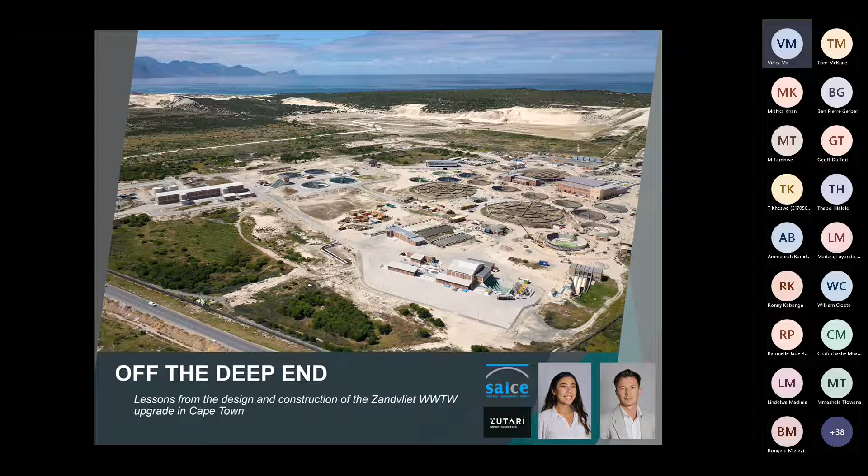Okay, let's firstly start off by introducing ourselves. So I am Ben Gerber. I was born in George in the Western Cape. I matriculated at Outeniqua High School in George, moved to Cape Town after high school, and obtained my Bachelor's of Technology from CPUT. I then very recently registered as a professional engineering technician in 2022. I have about 5 years of experience within the built environment unit at Zutari and Aurecon.

Major projects that I have been involved in, both national and international: some that are noteworthy are the current Harbour Arch development in Cape Town, which most of you would have seen when you drive into town. They're busy with construction and have topped out the first tower. Then there's St. Mary's water treatment works in Sydney, Australia, which I believe is one of the biggest water treatment works in Sydney. I also assisted the Aurecon Africa team in the design of the Calatrava Tower, which was planned to be the world's tallest building after the Burj Khalifa. I believe construction of that has halted at the moment.

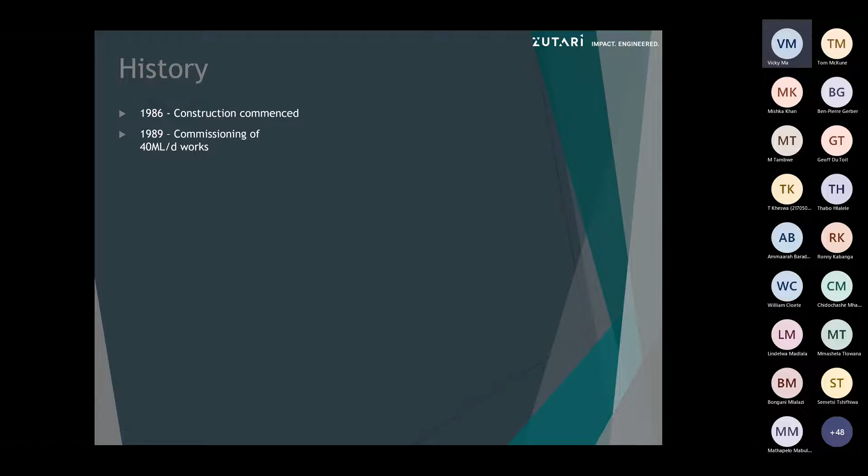So jumping into the history of Zandvliet, construction of Zandvliet wastewater treatment works began back in 1986 and was commissioned 3 years later in 1989 to treat an average dry weather flow of 40 megaliters a day. The plant treated municipal water from the surrounding areas of Khayelitsha, Blue Downs, and Monwabisi.

The flow was lifted into the inlet works by 2 screw pump stations. The inlet works then removed debris and grit from the wastewater. The screened flow then flowed by gravity to the 2 conventional activated sludge reactors, which operated under the modified Ludzack-Ettinger system that optimizes nitrogen removal.

Mixed liquor from the CAS plant was then fed to the 5 secondary settling tanks, which separated clear effluent from the particulate biomass by means of sedimentation. The clear effluent then drains by gravity to the chlorine contact tank, which disinfects the effluent against pathogens before it is discharged into the Kuils River.

The return activated sludge from the SSTs was returned to the CAS to prevent washout of biomass. The waste activated sludge from the CAS plants were diverted to sludge lagoons.

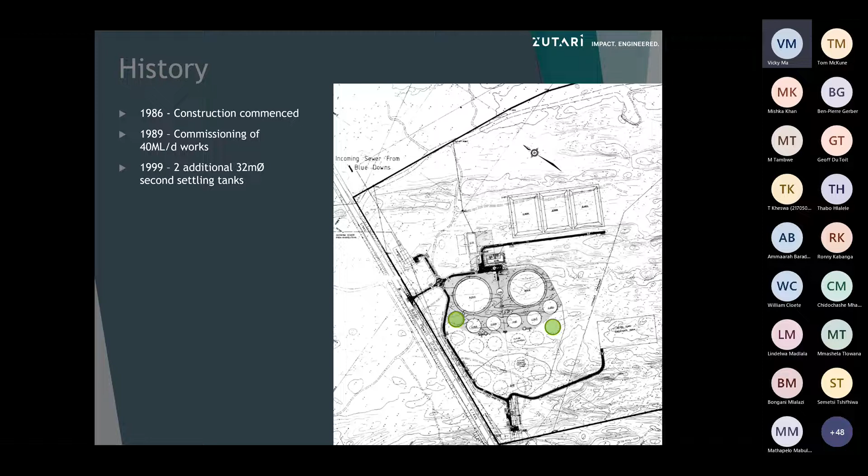Over the years, the plant expanded to cater for the growing population. First, 2 more secondary settling tanks were added. Then the sludge lagoons were replaced by a sludge dewatering facility, which eventually had 4 belt presses. 1 more clarifier along with a scum removal system was added in 2005.

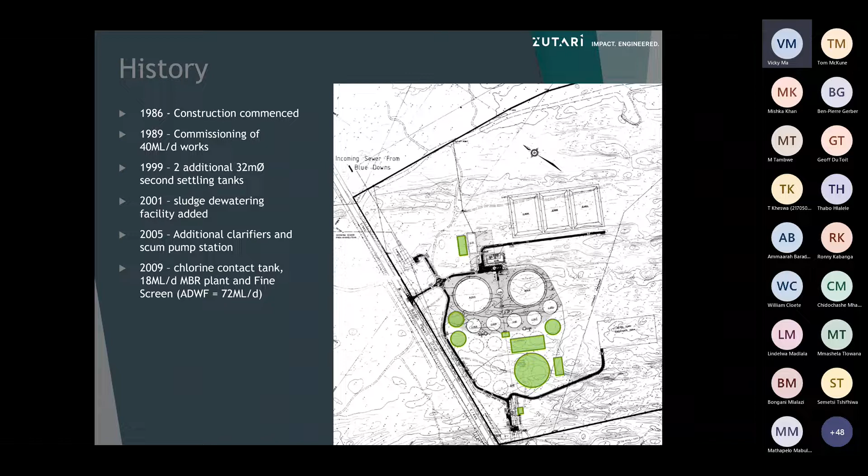In 2009, the first ever ultrafiltration membrane plant in Africa was commissioned on Zandvliet wastewater treatment works, bringing the total capacity of the plant to an average dry weather flow of 72 megaliters a day.

Since the last upgrade in 2009, Zandvliet and the surrounding areas have grown significantly. In 2014, Zutari was appointed by the City of Cape Town to further upgrade the plant to treat an average dry weather flow of 90 megaliters per day by constructing an 18 megaliters per day ultrafiltration membrane plant.

However, at the time of appointment, the plant was already receiving flows higher than 90. So the first step in the design was to make sensible projections on future flows and loads expected within the Zandvliet catchment. We looked at the historical wastewater flow and load data recorded at the plant, as well as population data from the national census.

Next, we assessed the plant performance capacity and carried out a conditional assessment of all the works. After our investigations, we found that the plants were hugely overloaded and that the flows were likely to immediately exceed the proposed upgrade of 90 megaliters per day, and were likely to reach 120 by 2023 and 150 by 2040.

So for this upgrade, we designed the civil infrastructure for the eventual flow of an average dry weather flow of 150 megaliters per day and equipped mechanically for 90 with redundancies. We also identified a number of bottlenecks on the plants that needed immediate alleviation.

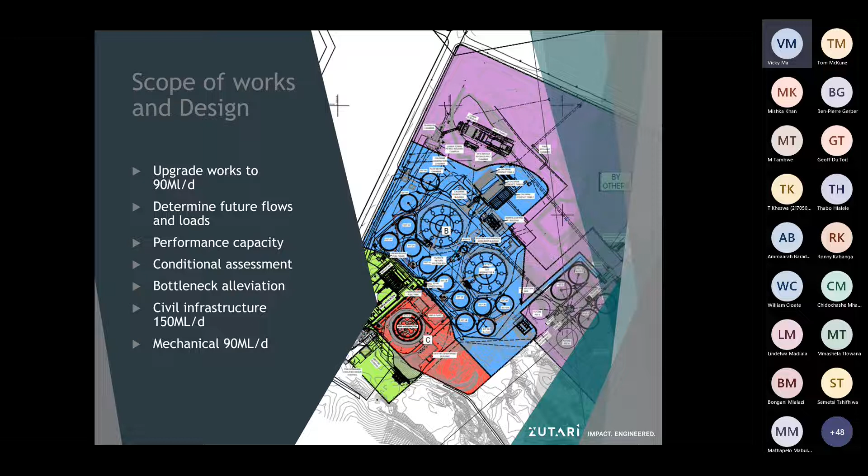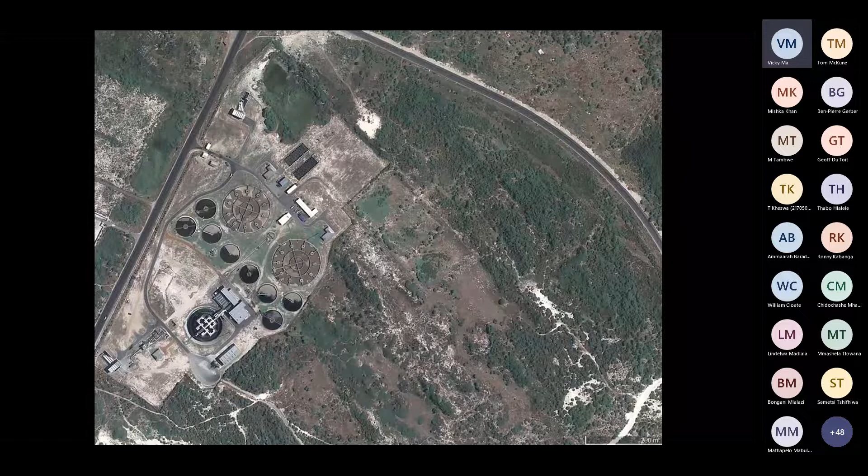This is currently about 5 months ago. This was taken in January 2022. 5 years later, you can see the massive expansion and everything that has been done over the last 5 years.

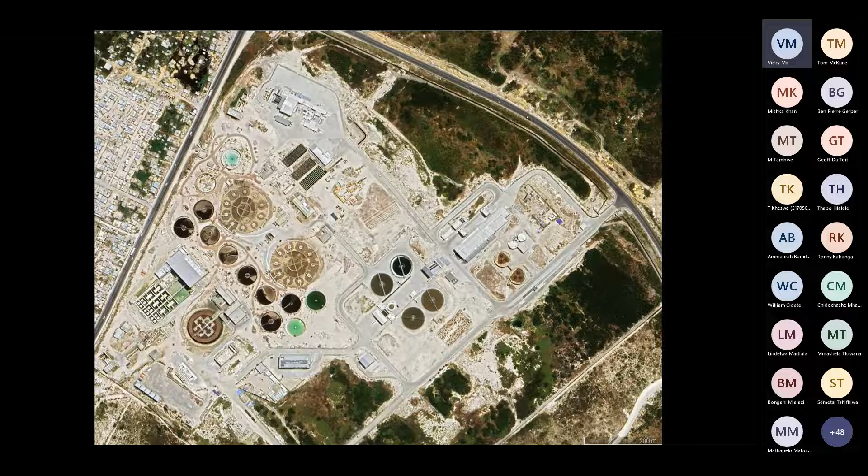Okay, then I'll jump into the process. So pre-treatment, it started at the beginning.

The existing screw pump stations and inlet works, which you can see in the photos, were a huge hydraulic bottleneck. Flooding often occurred during high flows, which drowned the flumes and caused inaccurate flow readings. The inlet works was also ineffective in removing screenings and grit, which caused issues downstream.

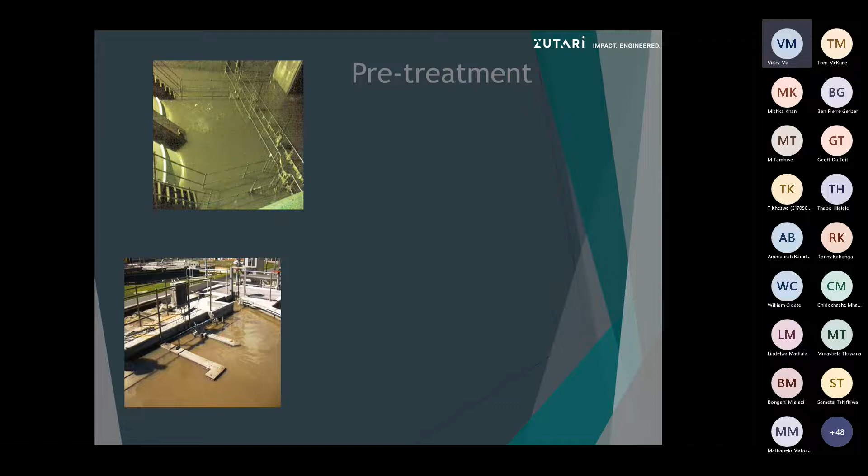So new screw pump stations and new inlet works were designed to cope with the increasing flows. This new civil infrastructure design capacity was built for an average dry weather flow of 150 megaliters a day, to allow for future upgrades as well.

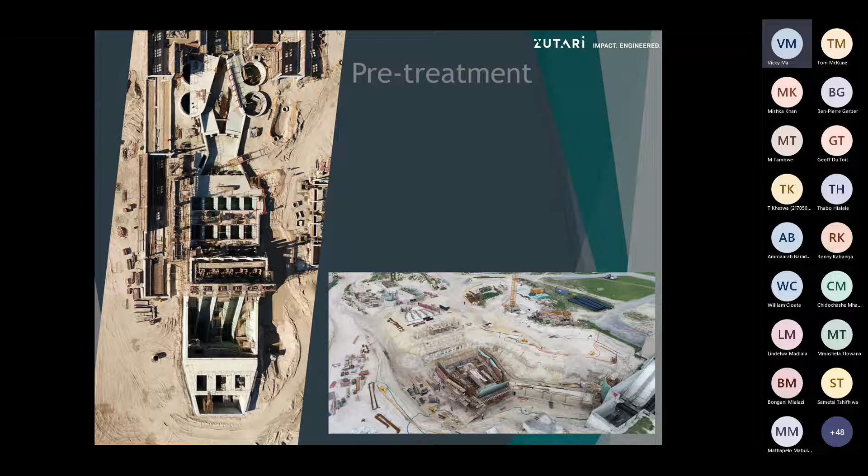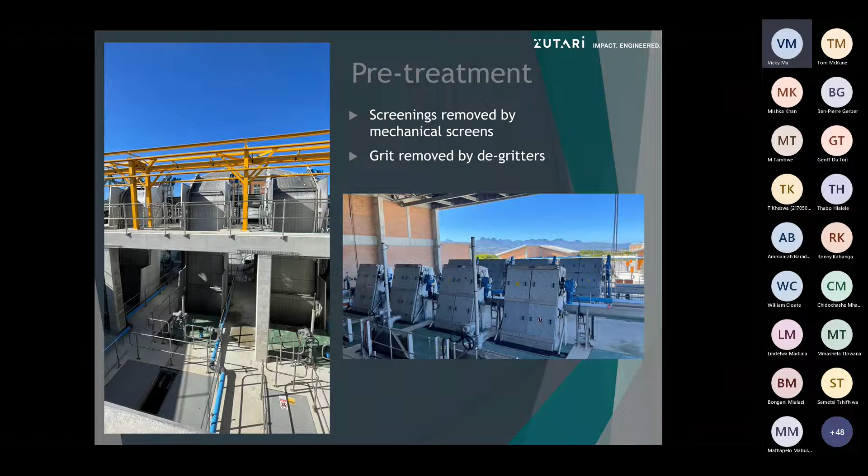The new inlet works complex consists of a lower screw pump station, which receives all the incoming flow to Zandvliet. Rubbish is removed through a series of mechanical screens, and the grit is removed through degritters. Screenings that are removed are conveyed into a skip for off-site safe removal.

One of the war stories from site, from the construction of the inlet works, can be seen in the next video.

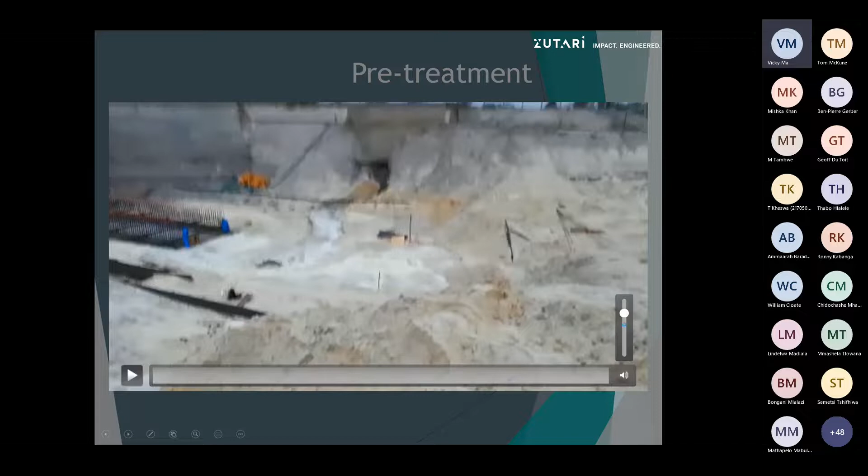That's funny, that's a big fuck up.

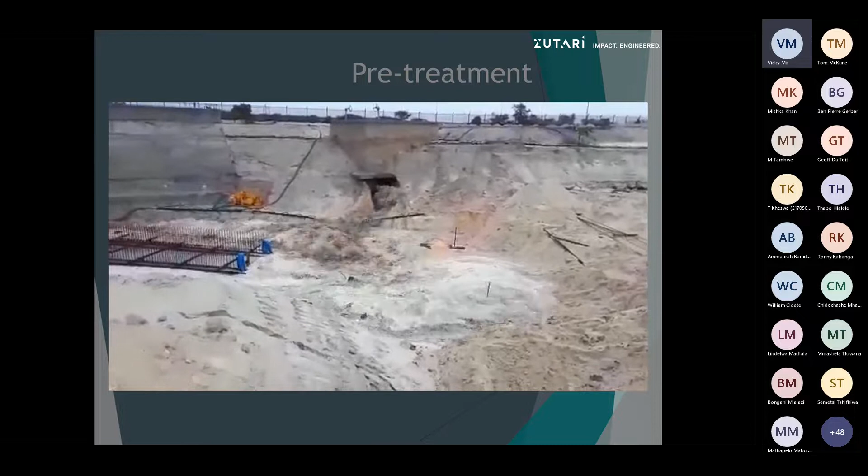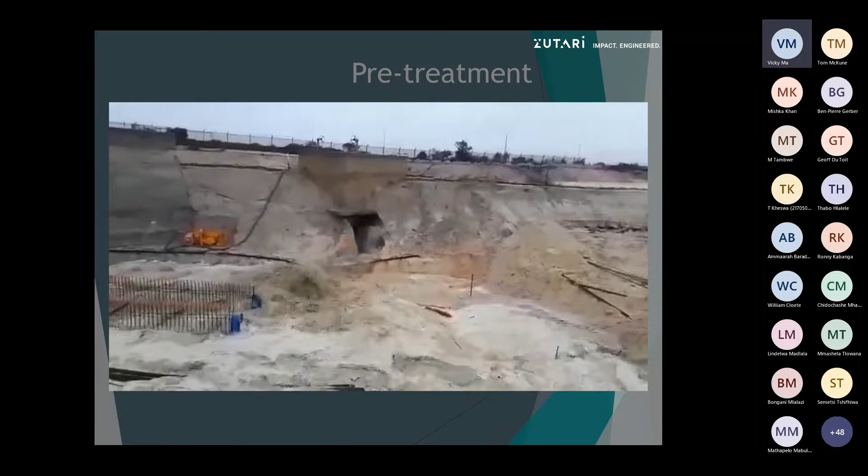During the construction of the deepest base on site, a flooding occurred. This was due to an open sluice gate that no one knew was open, as it was submerged in water. It was fine before the excavations began, as the sand on the other side applied pressure to block the flow. But once we started to excavate, there was not enough earth to hold back the flow. Luckily for everyone, no workers were inside the excavation, as this would have been a massive health and safety risk to all involved.

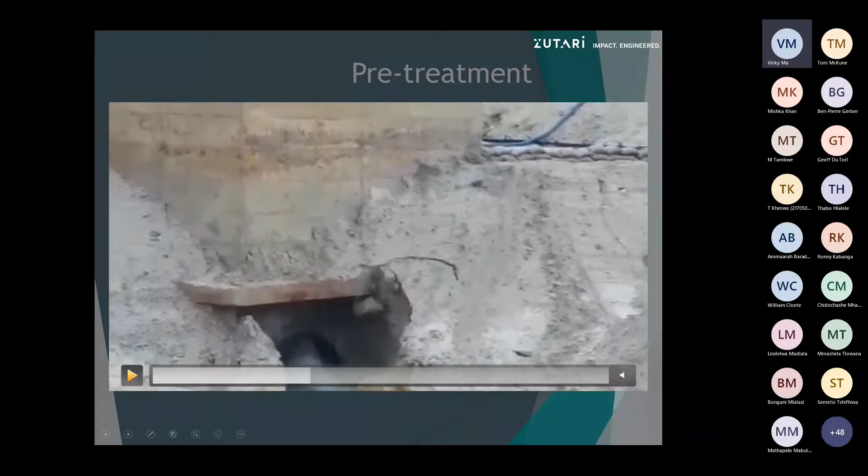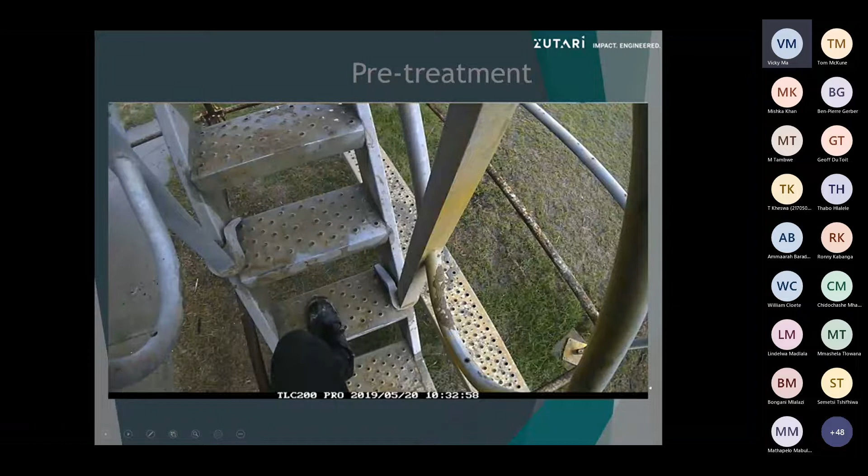In the following time-lapse video being played, you can see the flood that occurred delayed construction by approximately 5 days, but in the end we managed to still construct a beautiful inlet works.

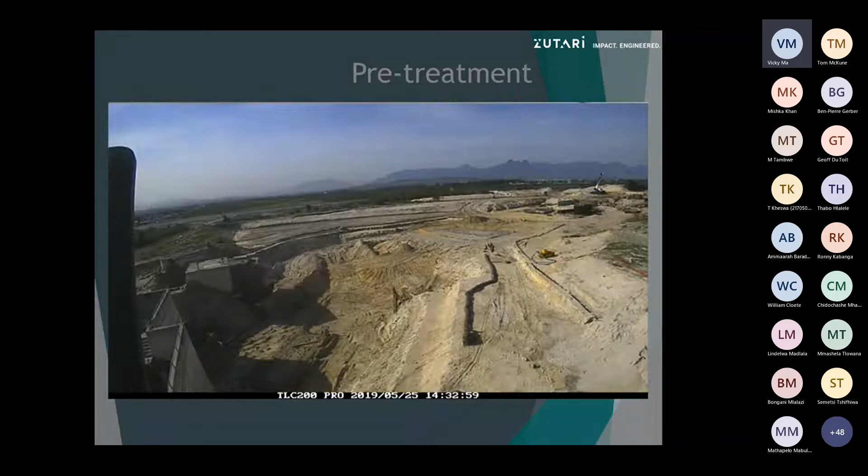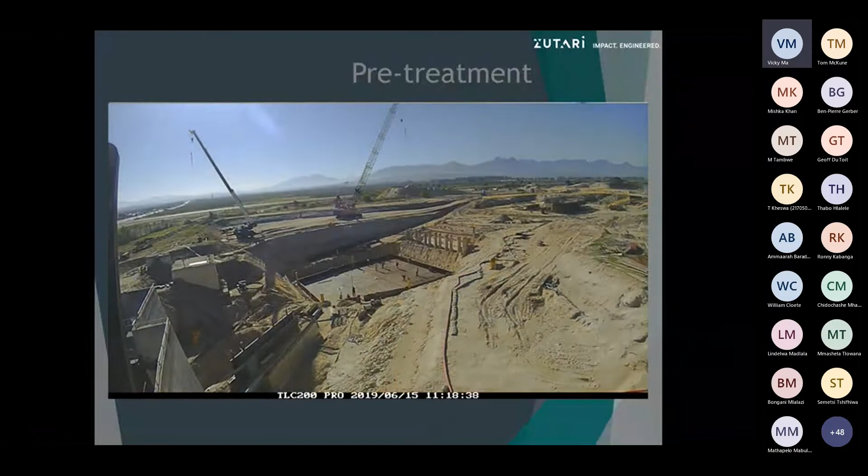The inlet works was the deepest building on Zandvliet, with a total depth of 8 meters below the final platform level at its deepest point. This meant that the deepest base of the inlet works was merely at 4 meters above mean sea level, which was about 6 meters under the water table.

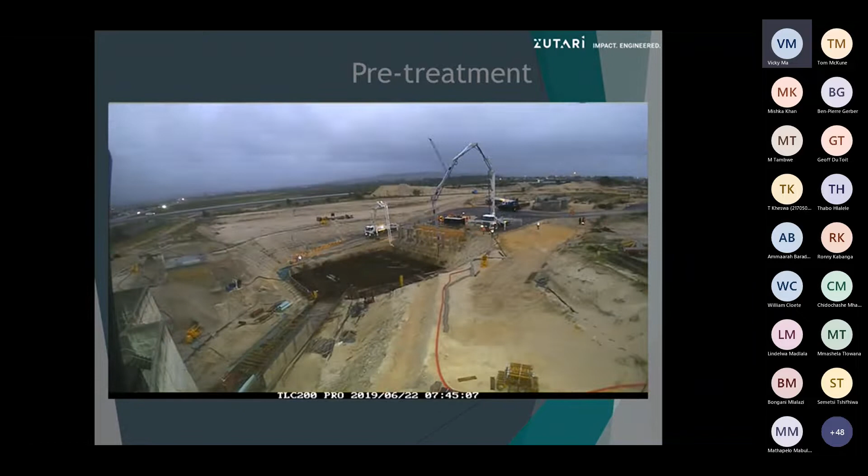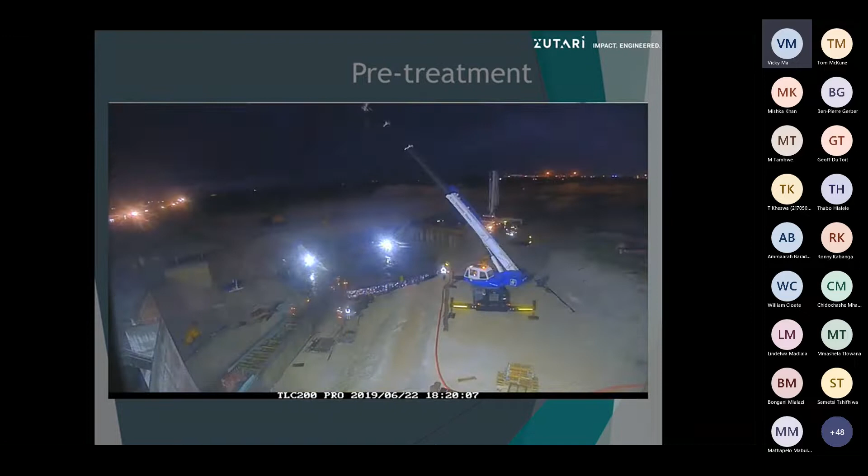This was a major challenge during construction and meant 24/7 dewatering was required to enable contractors to work within the water table. Dewatering was achieved by creating rings of boreholes at depths of 4 meters plus, at 1 meter centers to centers. These boreholes were connected to diesel pumps, which ran day and night to ensure the water table was pumped down to create a dry working platform.

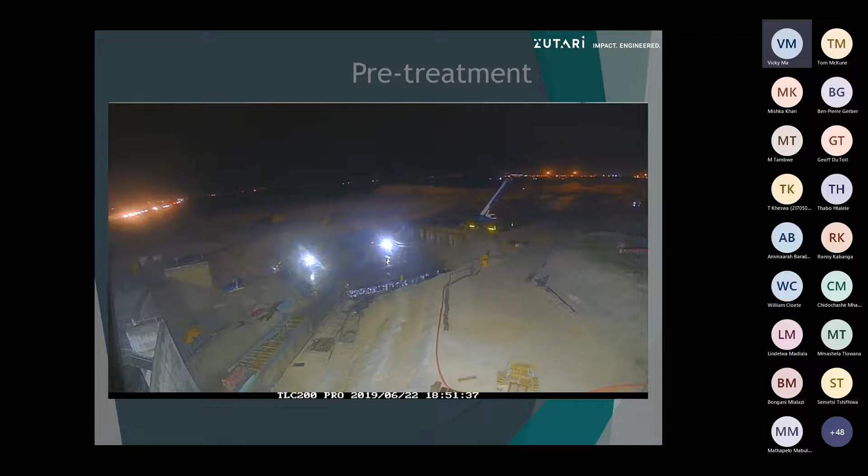In the next photos, we will show you the completed inlet works. The first photo shows you the 4 Archimedes screws that lift the water into the rest of the inlet works. These screws are massive, standing at 2 meters in diameter and 16 meters in length. It was quite a sight to behold the installation of these screws, as each screw required 2 cranes to lift it carefully into place.

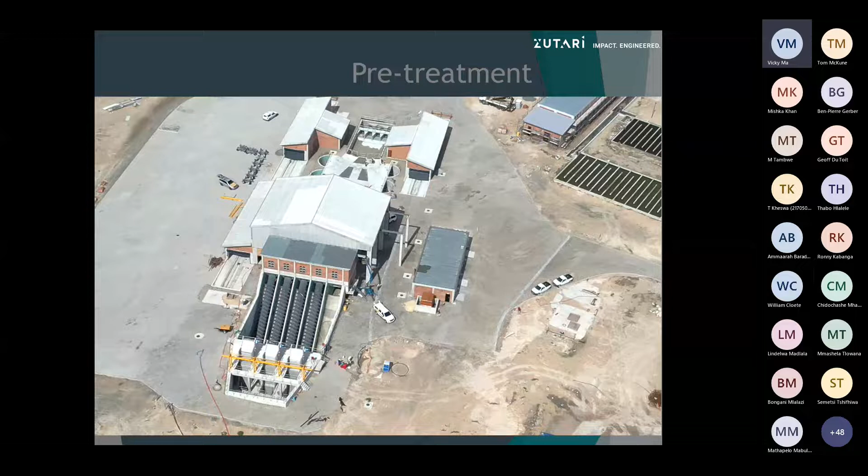In the following photo, you can see in the back the inlet work structure, roof sheltering the screens, and in the front you can see the 2 degritter rooms, where the grit is cleaned and stored for safe off-site disposal.

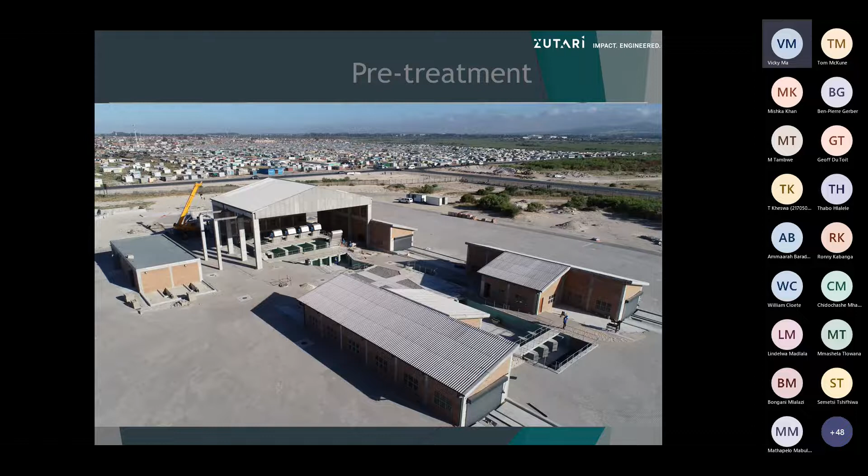Okay, let's move on to the next step of the process, the primary treatment. So the decision to incorporate primary settling tanks, known as PSTs, into the system was due to the urgent need for treatment capacity in the activated sludge plants.

PSTs provide a reduction in the influent organics, solids, and nutrient loads to the activated sludge plant at a cost-effective rate. This is done when comparing the additional capacity the PSTs can deliver versus the capital cost it costs to construct them.

PSTs remove the settleable solids by means of sedimentation. The PST's underflow is discharged to the primary sludge holding tank at the sludge dewatering facility. The overflow from the PSTs, known as the settled wastewater, is distributed between the biological treatment plants, MBR-A and B, and the remainder is fed by gravity to the 2 CAS plants.

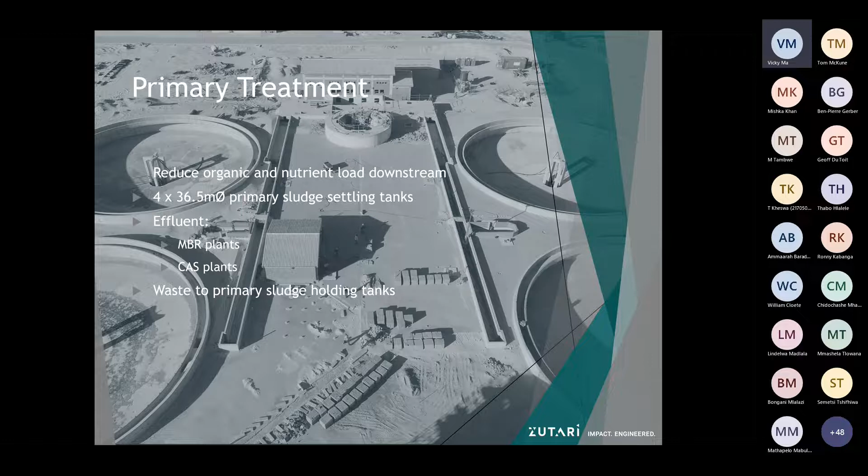So the next step in the treatment is the secondary treatment. And on Zandvliet, we have 2 types, the membrane plants and the conventional treatment plants. So I'll take you through the membrane plant first.

Zutari was contracted to design a new 18 megaliters per day membrane plant. In recent years, membrane treatment technology has become one of the preferred methods for treating water and wastewater in many countries. The conventional treatment system, which separates solids and liquids through sedimentation, generally requires a much bigger footprint with lots of civil works involved.

Skilled operator attention is also very intensive to ensure effective treatment. Whereas with membrane technology, although the capital cost is significantly more, the footprint required is much smaller, and it does not require many skilled operators, as most of the operation is automated. Another benefit is that with membrane technology, there's an actual physical barrier that separates the treated water and nutrients, so no matter what the inflow is like on the day, the quality of the treated effluent remains the same.

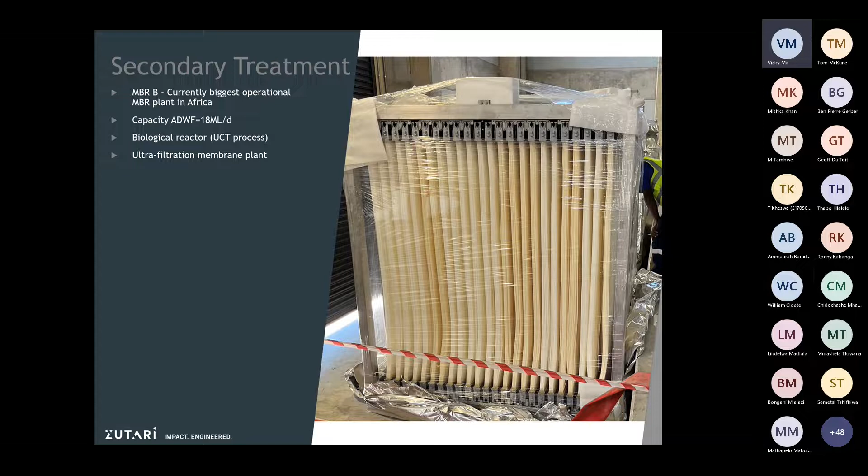So the newly constructed membrane plant was finished in 2021 and commissioned earlier this year. It is currently the biggest operational membrane plant in Africa.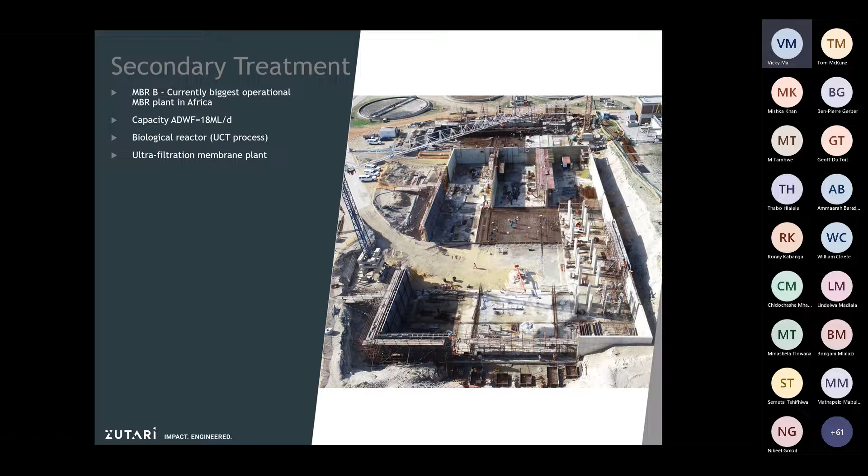So the settled wastewater from the primary settling tanks is mechanically screened again before being directed to the membrane bioreactors. The bioreactor operates under a UCT type process with an ultrafiltration membrane plant attached to remove biodegradable organics, nitrogen, and phosphate from the wastewater. The cleaned water is then used as site service water, and then the sludge is stored in holding tanks to be dewatered.

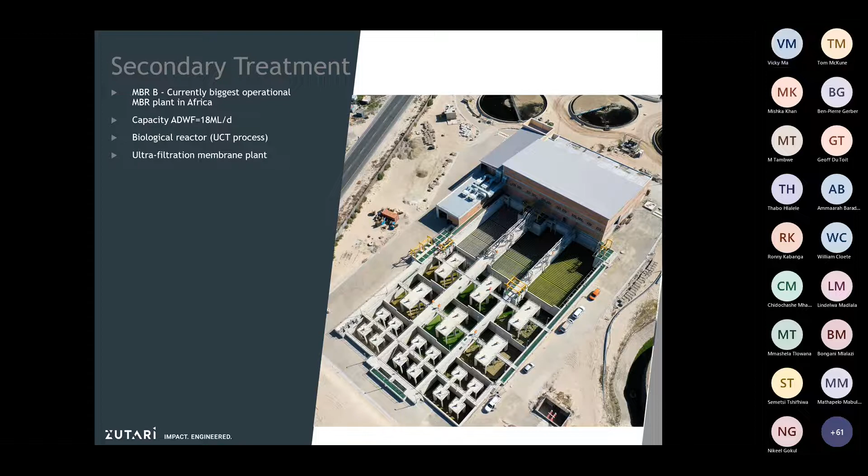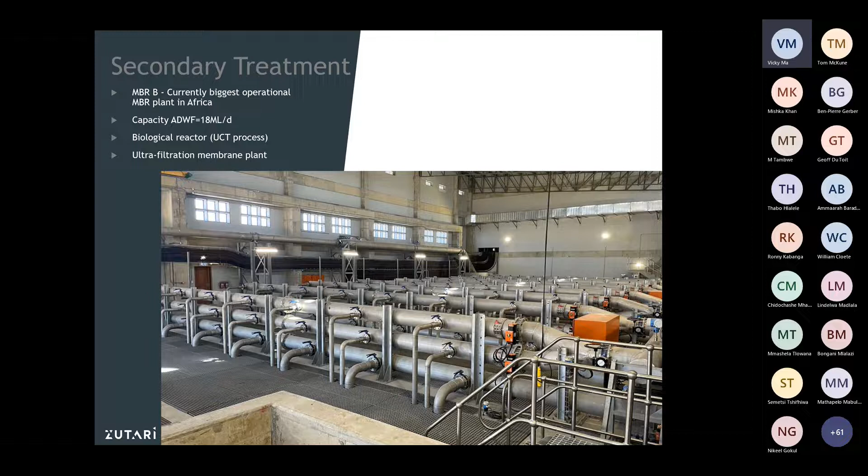In this photo, you can see the ultrafiltration membrane plants. The cassettes are submerged under the grids. This makes the whole process area very clean. Each lane is equipped with automated valves so that the optimal cleaning sequence can be achieved. As this plant is fully automated, if there is an issue, you could turn on or off a specific operation in the control room on site or through your phone.

So before the upgrade, we also had an existing membrane plant on site that was commissioned in 2009. This membrane bioreactor was a glass-fused steel round tank that treated an average dry weather flow of 18 megaliters per day. The tank outer wall itself was showing signs of failure. There were little leaks everywhere, and the steel wall bowed out at the bottom of the tank as well.

The lifespan of any membrane cassettes is around 10 to 15 years, which means that they would have reached the end of their life expectancy. The reactor was also overloaded, so it had to be refurbished.

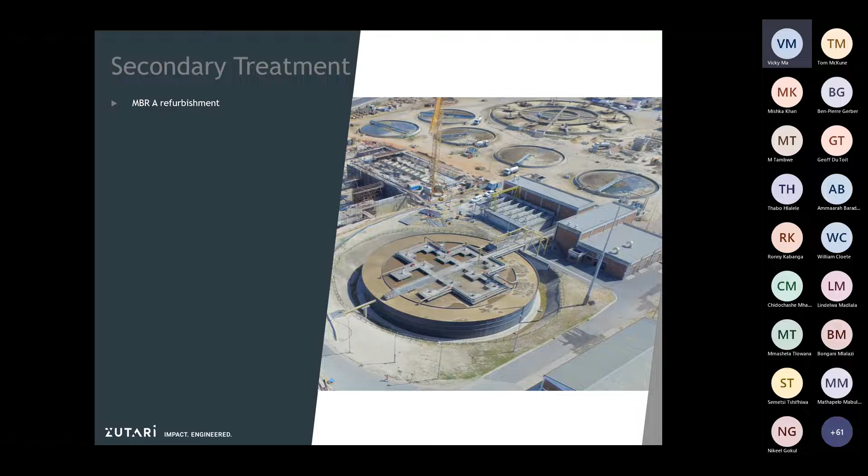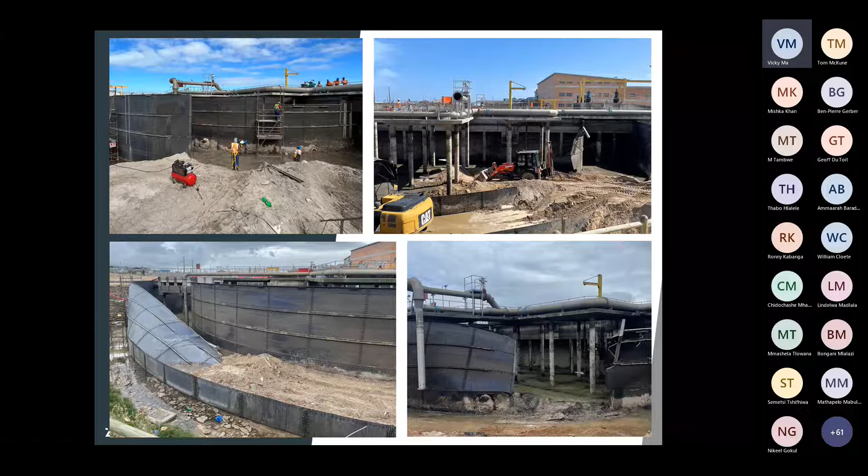The refurbishment process started by us pumping out and cleaning the structure. The steel walls were demolished and replaced with concrete walls as it lasts longer. We also wanted to retain as much of the existing footing as possible, which saved time and cost to the project, so that the inner wall base was not demolished.

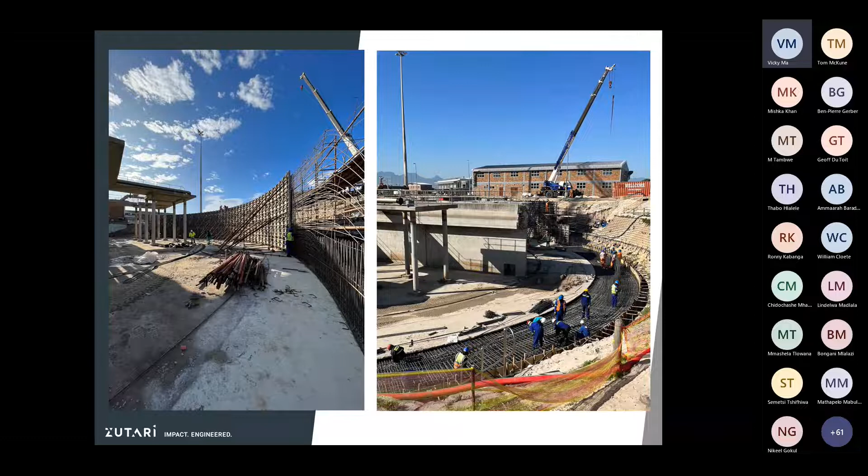This meant that the new wall built is actually not tied to the existing footing and therefore does not transfer any moment onto the base. So the inner wall sits on a bearing pad that allows movement by a maximum of 6 millimeters in either direction to accommodate for the difference in water level of the different treatment zones. Construction is currently going well and on program, and it is expected to finish at the end of this year.

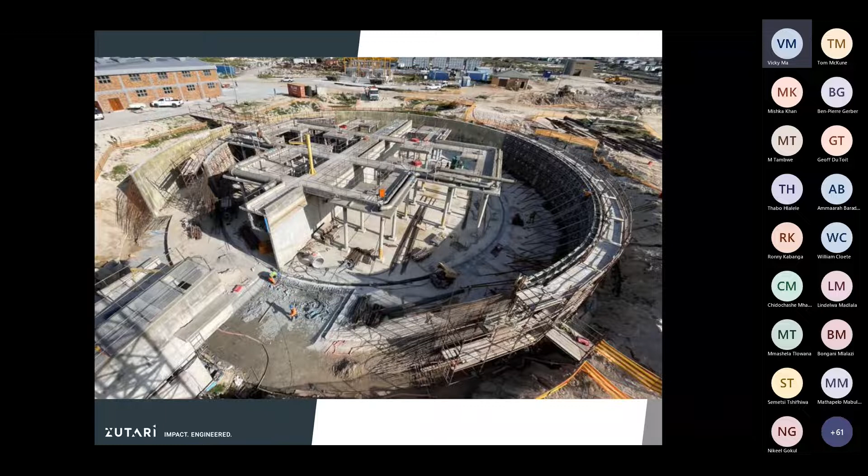Okay, then I'll move on to the two existing CAS plants. The two CAS plants, with an average dry weather flow capacity of 27 megaliters a day respectively, was, as previously mentioned, constructed in 1989. Since then, the reactors have not been refurbished or upgraded.

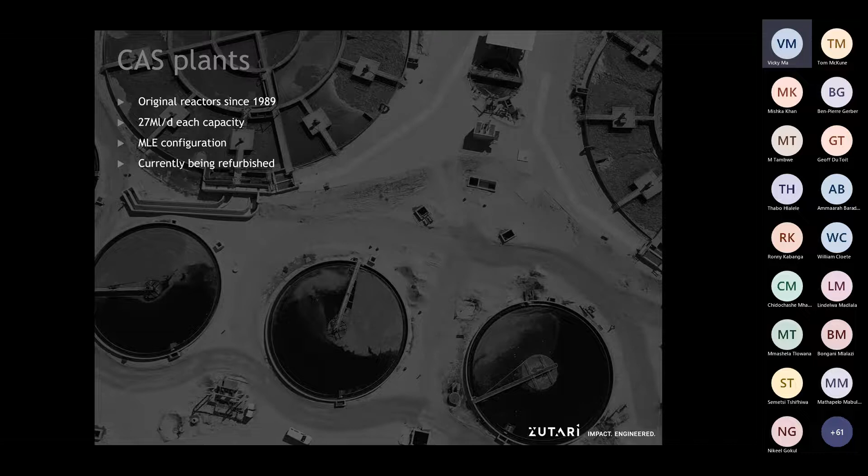As part of the civil project, the civil contractors were responsible for the cleaning out of these reactors. Zandvliet is situated next to a major sand mine, and the southeaster wind almost blows on a daily basis across the site. This has resulted in almost all existing structures being filled with wind-blown sand.

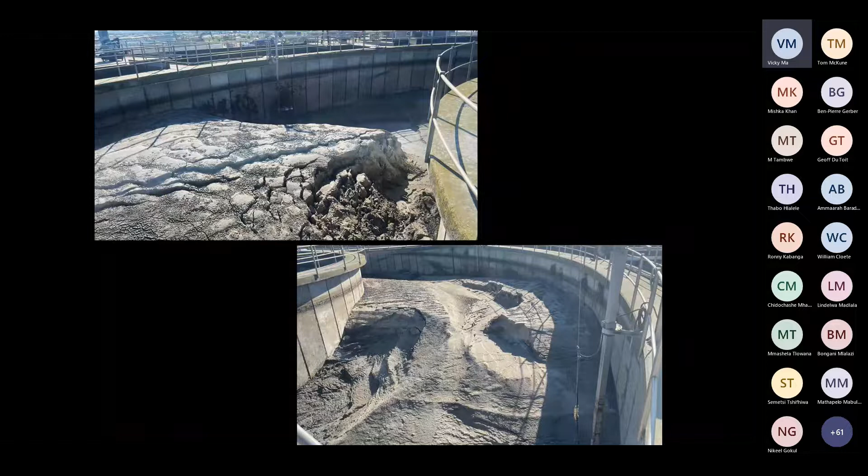Over the last 30 years, the sand-blown silt has settled to the bottom of the reactors, which has decreased the treatment capacity by almost 70%. In the photo shown, you can see the accumulated sand of 4 meters in depth after we emptied the first CAS.

After cleaning out, the mechanical contractor will be responsible for the refurbishment of all the mechanical equipment. This is something that we are currently busy with on site. I think those pictures are probably a week or two ago.

This is a very messy job, as can be seen, but it is required to return the plant to its full treatment capacity. And it's not often that a plant has the luxury of taking, I think we are one of the first plants ever that can take an entire reactor offline like this, because we have enough capacity.

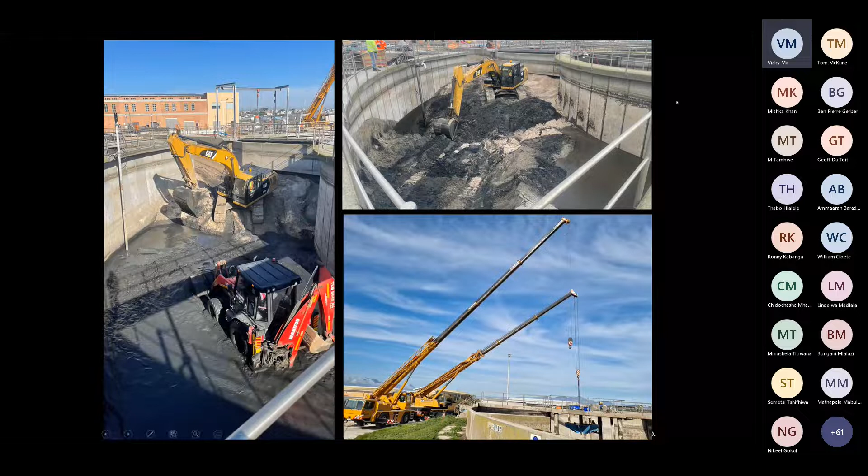Because of the completed reactor, given the poor settleability of sludge observed at the existing SSTs, it was recommended that additional settling capacity is needed. It was therefore proposed that the upgrades provide for an additional 2 SSTs per CAS plant to achieve effective separation between the activated sludge and the treated effluent.

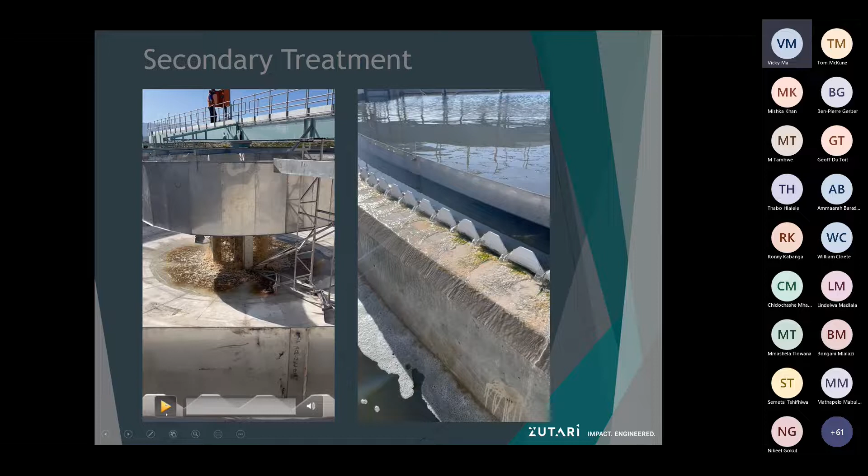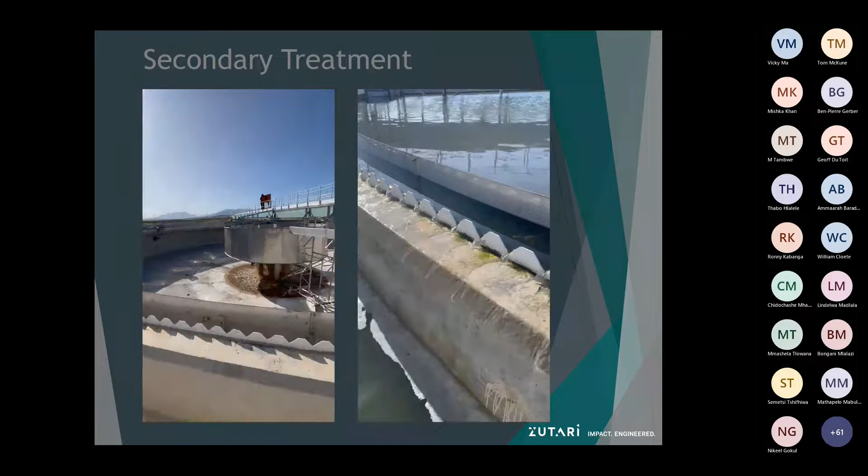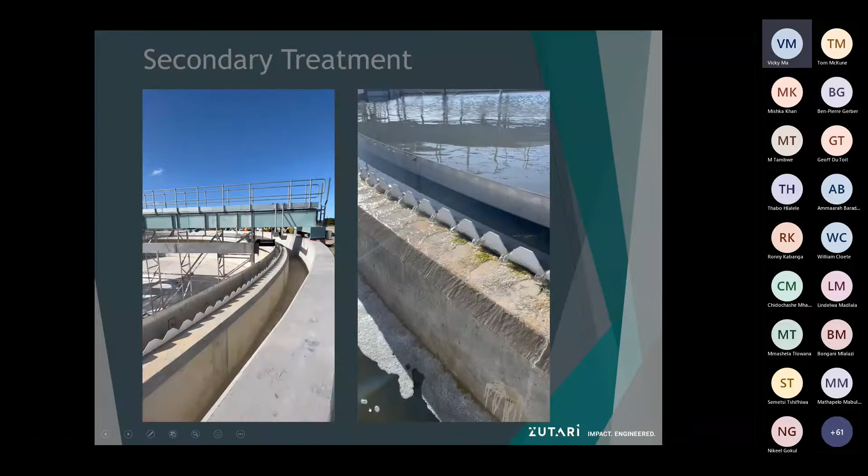As can be seen in the left video, it was a very proud moment for everyone on site. It was where the first initial flow entered into our first completed SST. The video on the right is an even prouder moment, that indicates the excellent effluent quality from this SST weeks later. That is a SST that is fully functioning, and how the effluent should look from SSTs.

The treated effluent from all 12 SSTs then flows through three chlorine contact tanks, where it gets dosed with chlorine gas to remove the remaining pathogens. Thereafter, the water is safe to discharge into the Kuils River and into the environment.

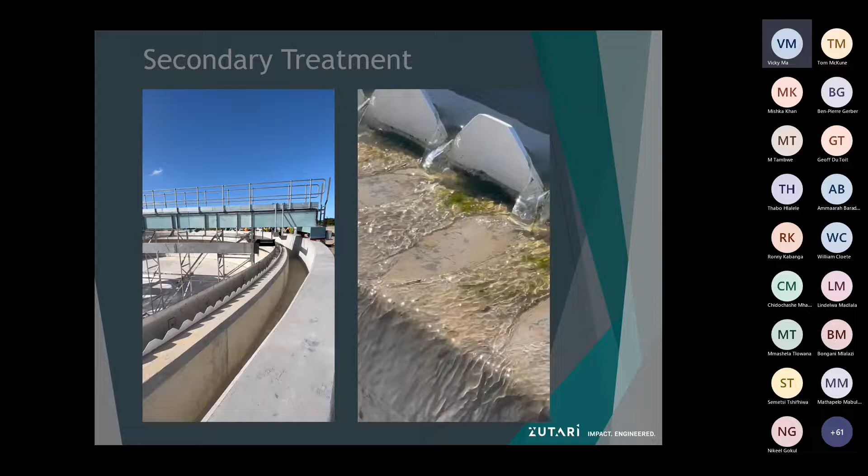So the last step of the treatment process is solids treatment. During the design phase, we looked at different technologies for sludge handling, and 2 prominent ones were considered, being the centrifuge or the belt press. Our studies looked at the total footprint required, maintenance during the lifespan, the net energy used, the amount of chemicals needed, the capital and operational costs.

We found that although the centrifuge required a much smaller footprint, they require significantly higher capital and operating costs, as well as higher energy demand and chemical consumption, making it very expensive overall. Therefore, we went with the belt presses.

Before construction, we modeled the civil infrastructure as well as all mechanical equipment using the software Revit, and utilized VR technology to check for any clashes. We also invited the client and key operational staff to give their input on improving the ease of operation and maintenance.

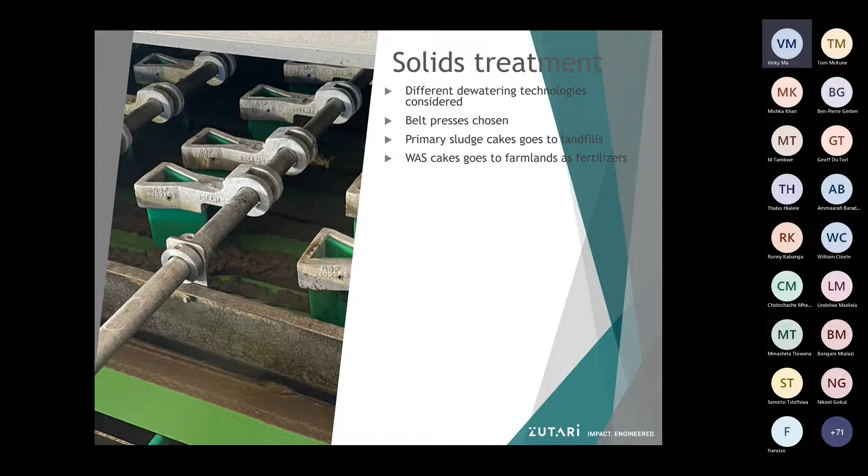So on Zandvliet, dedicated belt presses were needed to treat the two different kinds of sludge, as primary sludge is a lot thicker than waste-activated sludge. From the primary sludge holding tanks, the sludge is pumped into 4 primary sludge belt presses.

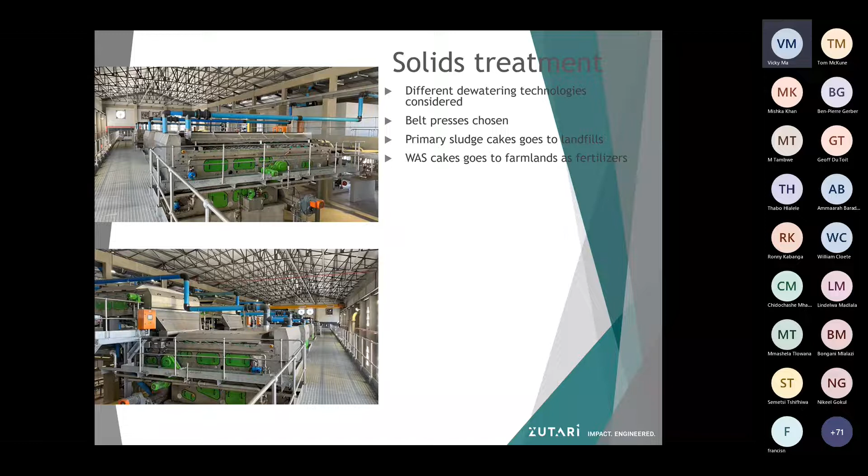The WAS is then pumped from the WAS holding tanks onto linear screens, where the sludge is thickened before being dewatered through the belts. The dewatered sludge from all the belt presses is pumped into their respective silos and transported either to landfills or used as fertilizers on farmlands.

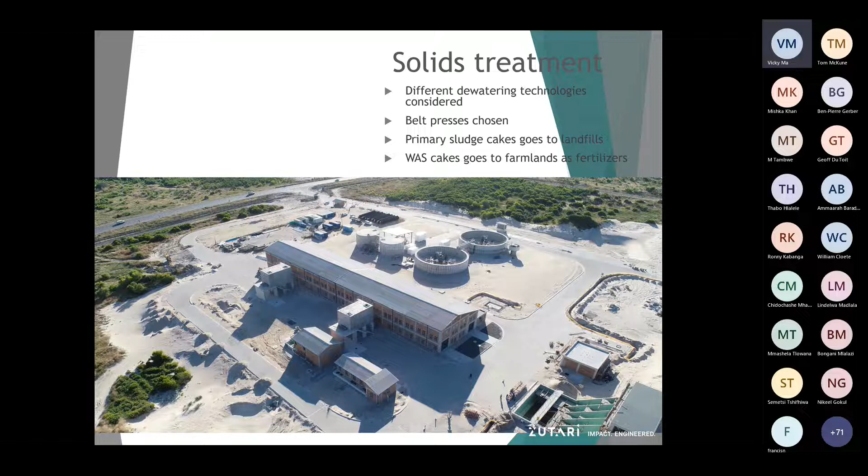Most of the equipment we have on site are actually from overseas, and the belt presses were from Germany. I was extremely fortunate to be able to go to the factory in Germany to inspect the machines before they were shipped to site. So there are actually a lot of travel perks that comes with this work.

Okay, then I'll move on to the administrative building. I was extremely fortunate to be sent to Zandvliet for the administrative building.

The purpose of the administration and control building was to provide a considered, robust, operator-centric facility and office space for the end users and the visitors to the Zandvliet wastewater treatment works through a simple yet bespoke architectural intervention.

The building size is approximately 2,100 square meters, which includes the ground floor, first floor, and carports. The construction period commenced in October 2019, and the client, the City of Cape Town, and the plant operator, Water and Sanitation South Africa, took occupation of the building in August 2021.

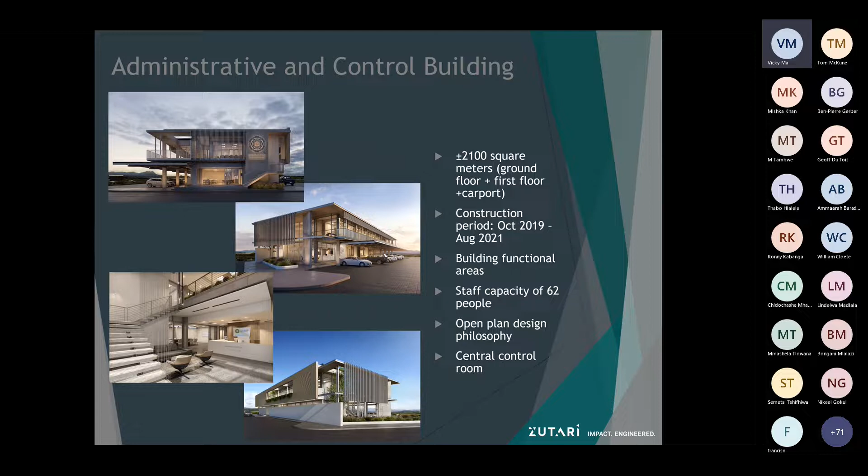The following pictures are some of the photos taken during the construction phase of the admin building.

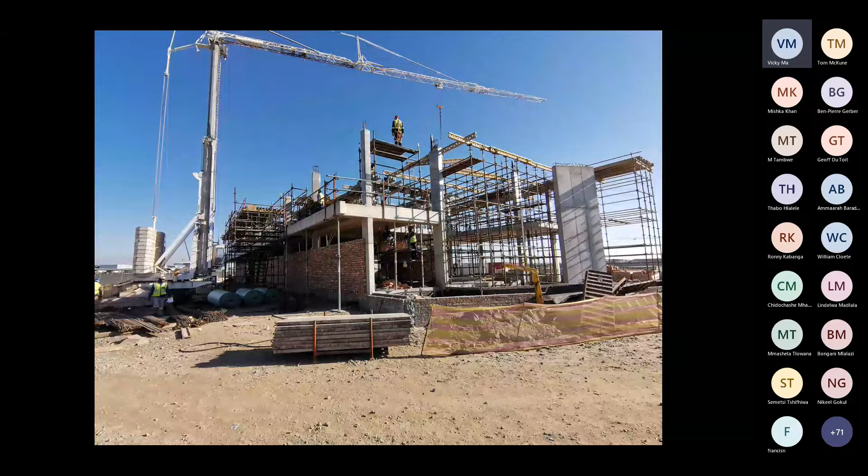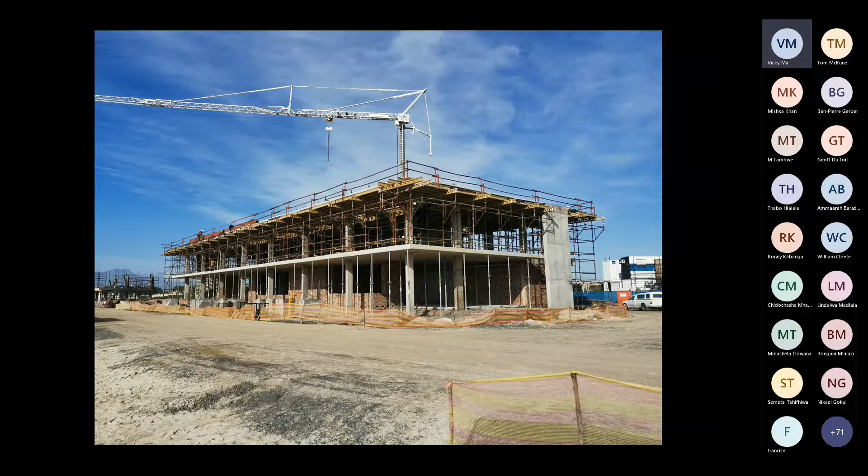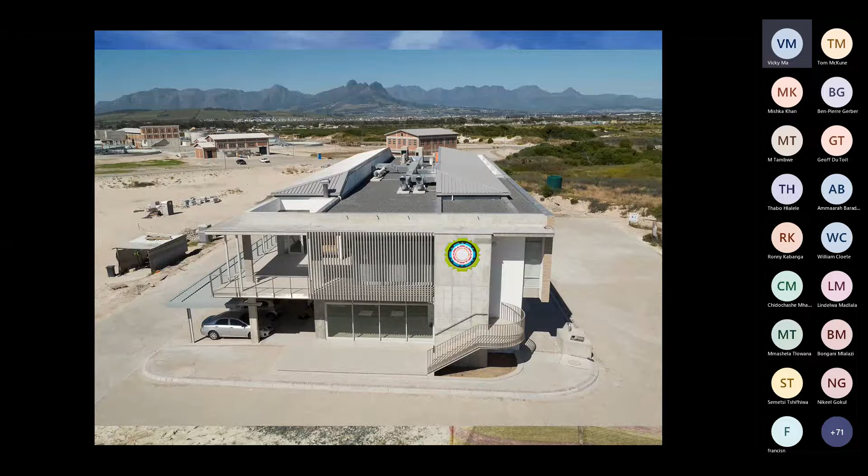Construction of this building taught me a lot of lessons, particularly dealing directly with architects on a daily basis. Having a specific level of detail and quality in mind at all times can be difficult, and it's hard to find the middle ground between the architect's dream and the engineer's solution. But it also taught me a lot about building regulations, including health and safety and fire requirements in all designs. In the end, it came out quite beautifully, and I think it's something both us and the client can be proud of - a state-of-the-art building and a space where you would want to work.

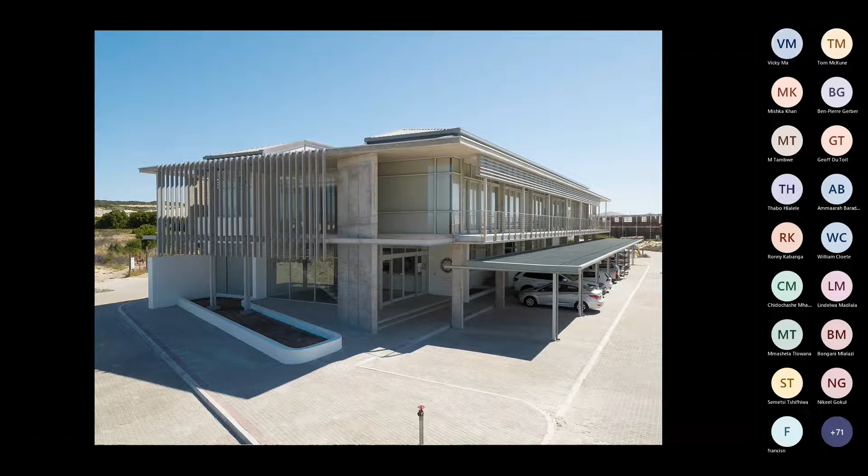As for the future, it is bright for Zandvliet. There are big plans in the works, the first being water reuse. During the droughts that devastated the country, the City of Cape Town, in its water strategy, identified the need to diversify drinking water sources alongside water saving and demand management. This will allow for a more resilient water supply. They have committed to source an additional 300 megaliters per day of drinking water from non-surface water sources by 2030, including desalination, groundwater abstraction, and water reuse. Zandvliet has been identified as one of the most promising wastewater treatment works from which to draw wastewater for water reuse.

Space has been allowed on site for a tertiary treatment facility to use the cleaned water from the membrane plants to feed advanced water purification plants off-site.

Another future possibility is energy recovery. During sludge handling workshops with the client, it was understood that this was something they were interested in for the future. It is possible for sludge to be digested anaerobically, resulting in a methane-rich biogas, which can then be burnt to generate electricity and heat. This would either be treated on site at Zandvliet or at other facilities in Cape Town. Provisions to treat on site have been allowed for in our design.

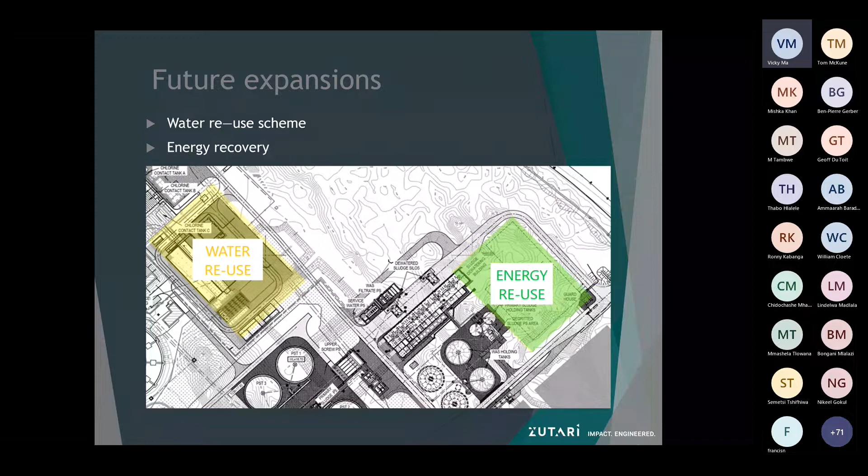As you know, we have been experiencing a lot of load shedding recently. Zandvliet is very hectic in energy consumption, and during load shedding, enormous amounts of diesel are consumed, which comes at a very high cost. If it's not pressing now, it is certainly more relevant going forward, and hopefully some of you will be working on these projects in the future.

So to conclude our presentation, we'll be sharing with you some lessons we picked up along the way.

Zandvliet was not a greenfield when we took over, so trying to place every new structure in a sensible way was not an easy task. For example, the original designers of the conventional activated sludge plant envisaged a total of 12 secondary settling tanks to be placed in the way shown on the screen.

However, when the first MBR was constructed, because of space limitations at the time, it was placed where the future settling tanks were to be built. This forced us to find alternative space for the new settling tanks, and because of the new positions, channels instead of pipes had to be designed to get wastewater to these tanks. Designing on a brownfield comes with various challenges, but if you apply your mind and think it through, you can always come up with a smart, innovative solution.

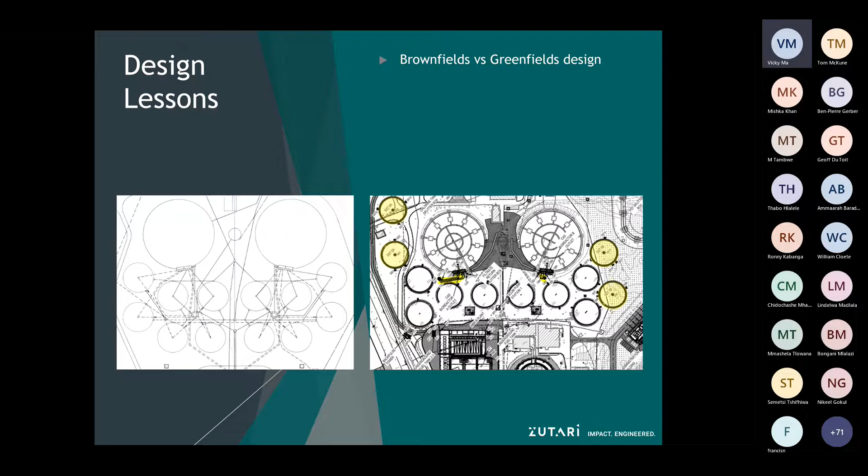Another thing is, when designing, always keep your end users in mind. Think how the design will work for them, and how they will get access to certain equipment so they can maintain and operate it. The more user-friendly, the better.

For example, on this contract, we installed valves in a chamber that is 1 meter off the ground. However, what we didn't account for was that the valve spindle sat another meter above the chamber. So now operators have to get up on top of the chamber to open and close the valve, which is unsafe and inconvenient, and we are resolving this on site.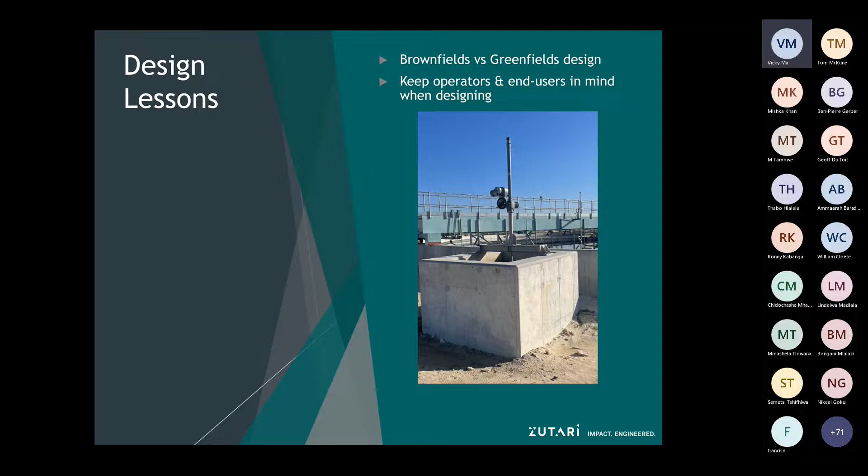When producing any construction drawings, it is always good practice to keep the contractor and builders in mind. Think about which annotations and dimensions will better help them understand a structure to build it correctly, and always show a plan of the structure along with key sections that show its complexity.

One of the biggest lessons we have learned is that if you're not familiar with something or don't understand how to design it properly, always consult someone who has worked in that field. Use your colleagues and teammates as sources of information in areas where your skills are lacking. Also, the more you ask, the more you learn. I am a civil engineer who designs buildings and services, but along the way I have learned how to size and select pumps for specific processes. So never be afraid to ask, and you might pick up extra skills that make you a better, more well-rounded engineer.

Okay, then construction lessons. Various lessons were learned during the construction phase of this project. A lot of them have been mentioned and shown in previous slides. Some not yet mentioned, for example, is the sequencing of the works between all 4 contracts.

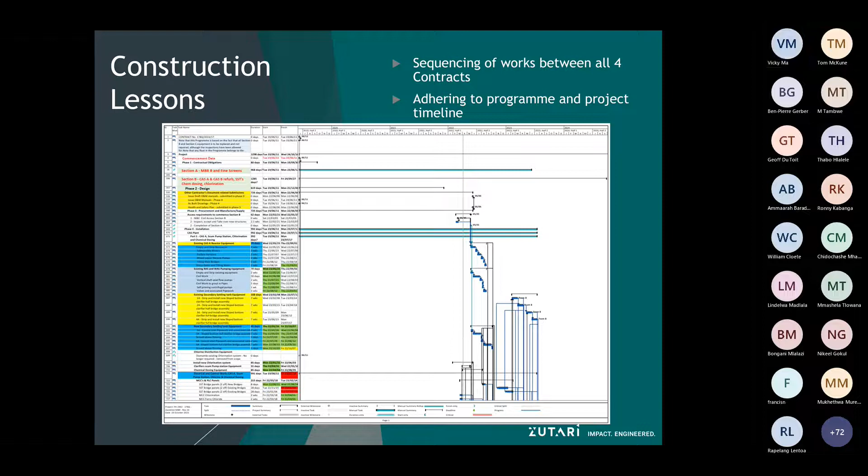Then staying within budget. This sounds easier said than done. On Zandvliet, the scope of the project changes on a monthly basis. For example, items like the cleaning out of the CAS plants, the cleaning out of MBRA, the entire scope of MBRA changed, and we're currently planning to build a new MV substation to feed the site. None of this was in the original tender or drawings. So staying within budget while completing all scoped works, as well as the additional wish-list items the client added during construction, is difficult, but achievable with proper cost estimates, monthly or even weekly budget discussions, and finalizing measurements of structures as soon as they are completed.

Then on existing services - as the latest Zandvliet project is on a brownfield site, as previously mentioned, the amount of existing services was truly terrifying. Working in and amongst existing pipes, cables, electricals, optic fibers, and other services was a big risk. Damage to electrical could lead to the entire plant going offline and flooding of all structures. Damage to existing pipes led to floods. Both incidents happened on various occasions, as the as-built drawings from the 1980s were not as accurate as they are today. To prevent these risks, all new services and exposed existing services were accurately surveyed, recorded, and clearly indicated on as-built drawings, so future projects know exactly where all services are in all areas. In areas where future works were expected, especially electrical and fiber optic cables, cables were placed in ducts to prevent possible damage.

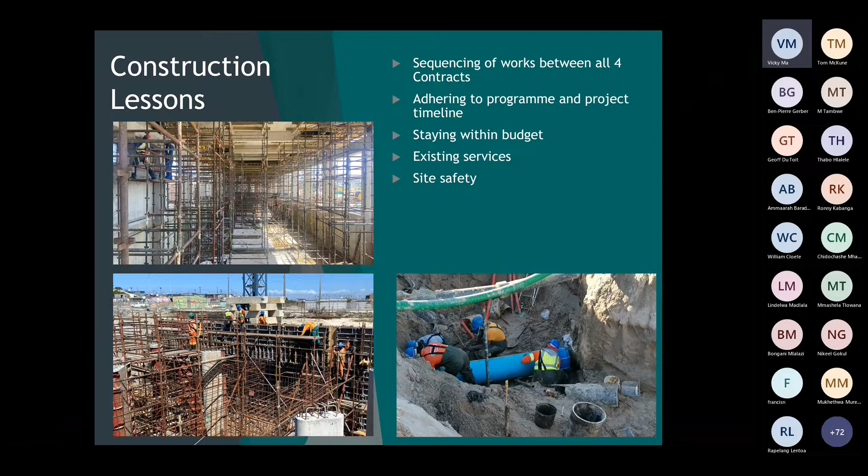Site safety is, as everyone knows, a very big one. All activities on site had to abide by the Occupational Health and Safety Act, Act 85 of 1993, and the Client Health and Safety Specifications. This is enforced daily by us, the engineering team, the contractor, and the occupational health and safety agent on duty. An external health and safety audit was conducted monthly to ensure compliance. Some major health and safety activities on site include, but are not limited to, deep excavation practices, working in confined spaces, working with pipelines, within pipelines and manholes, working at heights, and working in close proximity to hazardous material. So all necessary training, inductions, and inoculations were required for all parties before entering the site area. Daily visitors must receive a daily induction before accessing the plant.

Then lastly, the environmental on the final effluent. This type of project has a major positive impact on the surrounding communities. Not only does it provide a well-designed and functioning sewer network to the informal settlements and to most of the households, but it also cleans the sewer and puts clear, clean water back into the Kuils River that flows through our communities.

So to finish off the construction lessons, we encountered a lot of unexpected issues on site, such as floodings and vast extension of scopes. But this was all well managed within the team and with the contractor, and I think it's been a valuable experience to everyone involved.

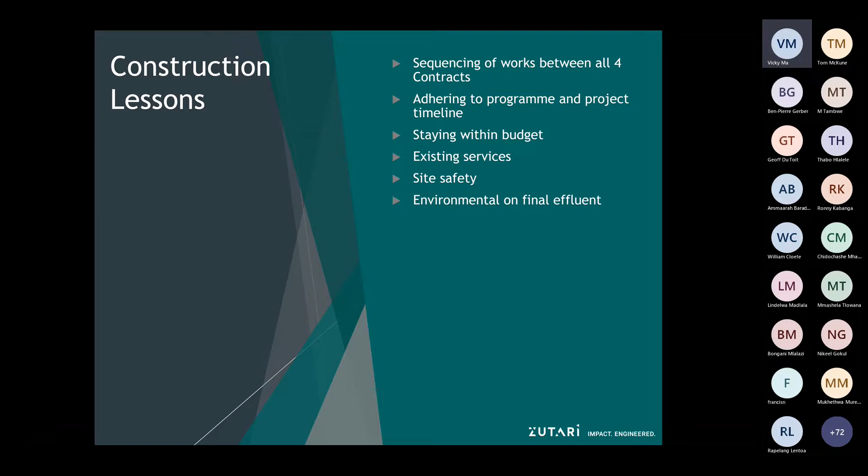Yeah, then thanks everyone. That concludes our presentation. Just a side note that the above structures are only the main process structures on Zandvliet. There are a lot of smaller structures which we have completed in the last 5 years that also play a very important role in the process, which was not mentioned.

Thanks, everyone. Right, thank you, Vicky and Ben, and I think they deserve a round of applause from those of you in tonight's session. Before we lambaste them with the questions that have been raised, and it's a pity your ECSA registration wasn't as easy as that.